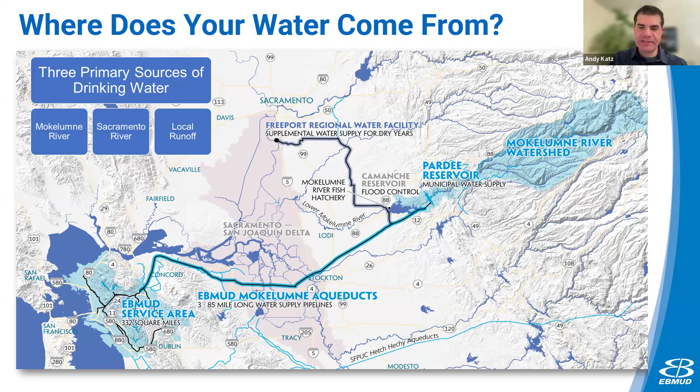And some other important facts to share that I think are important to note: about 90% of the water from the East Bay comes from the Sierra Nevada. So we're primarily collecting water in that upper Mokelumne River watershed. And 10% of our water is gathered in local reservoirs, primarily over the hills in the East Bay Hills area, and also in Lake Chabot. So that's about 10% of our water supply and storage.

The next slide, you can see some of the statistics that I just read off, but you can also see that we are serving all of you with 4,200 miles of pipeline. That's a lot of pipe. We operate in complex pressure zones where we have to make sure that everybody is getting good water pressure. We store reservoirs at different elevations to make sure that the engineering allows for a balance of water pressure and serving everyone with gravity-fed water supply. We do have to pump it up to get to those gravity-fed places. So it's a complex system, and there's a lot of careful engineering at work here.

I also call attention to the wastewater side. We have wastewater operations that you can see in the shaded box. So we don't serve the entire East Bay community with our wastewater services, but we make sure that we protect San Francisco Bay by having a main wastewater treatment plant. We work with our cities to collect the wastewater, and then it's conveyed into our collection system, and then we treat the wastewater at roughly around the MacArthur Maze.

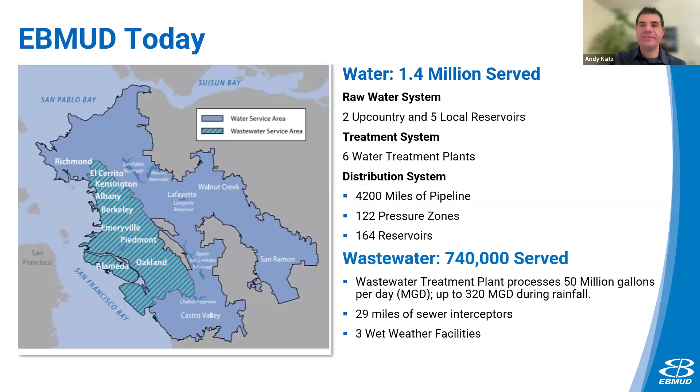So these are the big challenges that we're facing. First, aging infrastructure. We want to invest and renew infrastructure for reliability and resiliency. Our water supply, this is on the next slide. So we're planning for water supply into the future. Our environment. We're ensuring environmental stewardship for the watershed and San Francisco Bay. Climate change, adapting to climate change through infrastructure investments.

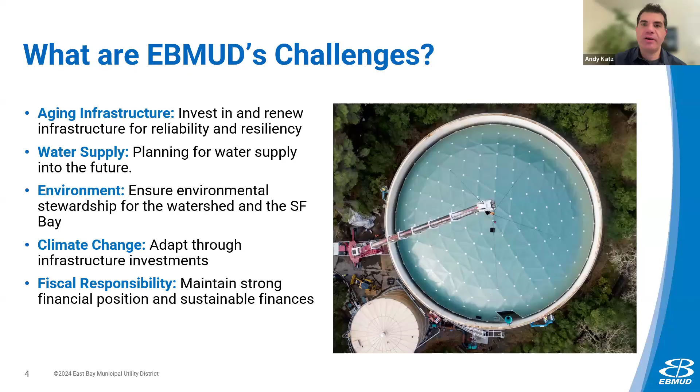We also have a fantastic zero net energy goal that we're moving towards by 2030, to have zero emissions out of our operations. And so we're not just adapting for climate change, we're also a part of the solution. And our fiscal responsibility, maintaining a strong financial position and sustainable finances.

So first, let's talk about investing in water supply. First and foremost, we want to be thinking about the future and making sure that our long-term water supply is reliable for us. And it's important to me to understand that we're getting that future water supply from a source that's sustainable, that continues our long history of being a steward for the environment, and that we don't impact or damage the environment to the extent we can.

So the Mokelumne supply is variable and vulnerable to droughts and climate change. We know that we're getting more frequent and more intense droughts because of climate change. And so that's why we have water conservation and water reuse programs that help us reduce demand. So in recent droughts, we've brought in supplemental supplies. That's what I referred to with our Freeport project.

That we have a Freeport intake facility on the Sacramento River, and we're exploring other diversified supplies. We have a partnership with some rice farms along the Feather River in far northern California. So we're also exploring very critical partnerships with farms in the northern San Joaquin Valley that I think are very important to preserve the groundwater basin and the areas in the North Valley, because the northern San Joaquin Valley, like much of the Central Valley, is losing its groundwater storage.

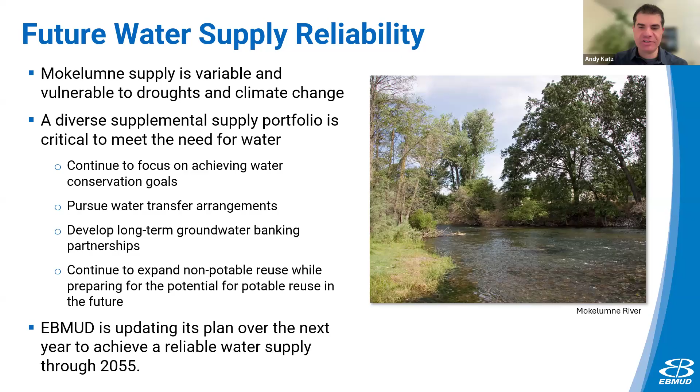And those partnerships and operationalizing many of the long understood principles about how to partner on preserving our groundwater aquifers, we're doing that. So we're moving forward on that, but we're not yet actually taking water and bringing it into our system on a large scale just yet. So we're updating our water supply plan over the next year to achieve a reliable supply through 2055. This diagram shows the different main buckets of water supply in our portfolio.

There are all of the different ways that make sense to different people, but collectively we are saving 45 million gallons per day of water conservation, and we want to increase that even more. Our goal is to increase water conservation to 70 million gallons per day by the year 2050. So in addition, we're looking into groundwater storage banking projects to bank water in those wet years and extract water during dry years. So these are all of the different components of our water supply program.

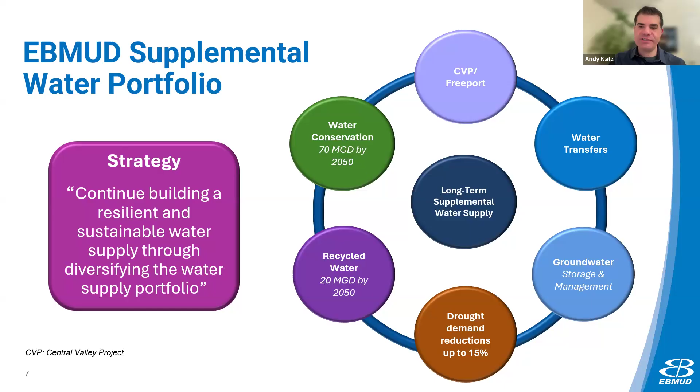And we, of course, do plan that in droughts, we'll need an extra push from our customers. So we consider drought demand reductions during those emergencies of up to 10 to 15% to be an important part of our portfolio too. And so this table on the next slide shows more information on the potential supplemental supply sources. While we have a successful non-potable reuse program that provides recycled water for irrigation and industrial uses, we also will explore the potential for using highly purified recycled water as a drinking supply in the future.

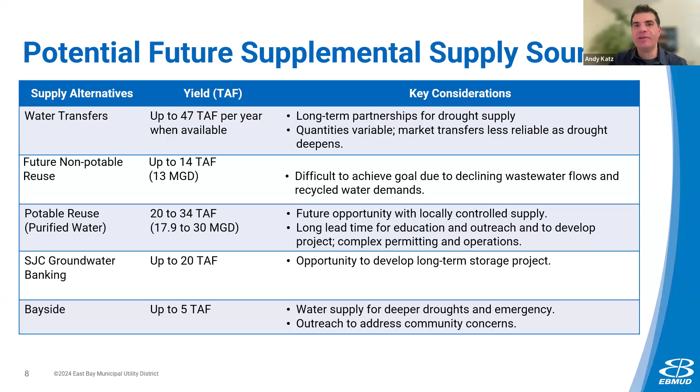I am interested in feedback about this. I'm very concerned about ensuring that we do not expose people to PFAS, that we keep our water quality high. But we need to make sure that we are maximizing conservation. But we have to look at all of the water supply options, particularly when new technology allows us to convey water that's reliable and safe. So this is something that many California agencies are considering or have implemented, and we're paying close attention to what other communities are doing.

You may remember that in the last major 4-year drought, many years ago, in that last year, we had that situation where the water had that algae kind of taste for just a couple months. We're glad that it was temporary and it never caused any safety issues. It was always safe to drink. But we took those taste and odor issues very seriously. It was the first time it had ever happened, and it's just because the water level in Pardee Reservoir sank so low that the intake valve was just at the level where a small plume of algae had bloomed.

And so we took that seriously and said, well, we need to really be able to make sure that our water treatment plants are up to the task of being able to clear those sorts of taste and odor issues in the future. So our water treatment plant is now able to actually neutralize those types of issues going forward. I'm very excited that we've made that investment; little things like that make a big difference for making sure that people can always rely on and trust our water.

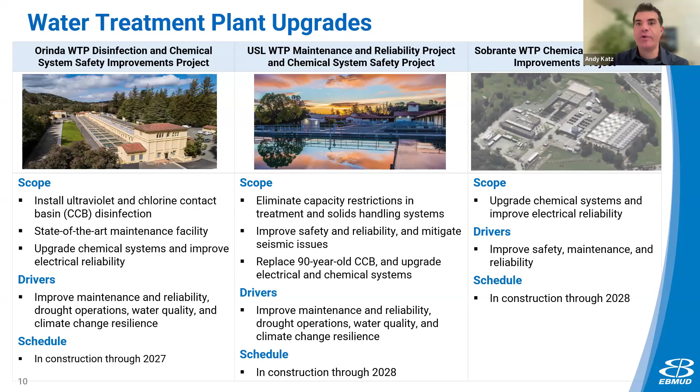We have upgraded our Caldecott aqueduct to be able to withstand a Hayward 7.0 earthquake. But we want to make sure that we are resilient and able to provide reliable water to customers, even though we will have disruptions in a Hayward 7.0. This is just for major infrastructure that would take years to rebuild. We need to make sure that is sturdy and ready to withstand the best that we can plan for.

So what's happening locally, though? As I mentioned, we have 4,200 miles of pipe, and we have other major facilities like smaller aqueducts that are conveying water through different portions of the service area. So our engineering team has provided a slide that lets you see where construction is happening in our community. So I'll point out some of the major projects that are happening.

One at Clayton, Fairmount, and Webster. That's a rate control station. Design work is happening much later. We're really just starting to plan what the needs are at that site. You can see it in El Cerrito. There's a Glendale regulator that you can see just at the top of Kensington. That is a standby regulator. So we are planning on constructing a new water pressure regulator. Planning for that will start next year, and design work and construction through 2027.

You can also see the Summit West pumping plant and the Berryman pumping plant are on our list here. Those are both in Berkeley. And the plan is to replace the existing Summit West pumping plant and demolish the Berryman pumping plant. Design is going to start this year and construction by 2030. So we're always planning for our infrastructure improvements, because it takes a long time. We are seeing our infrastructure aging and making sure that we get ahead of the problem.

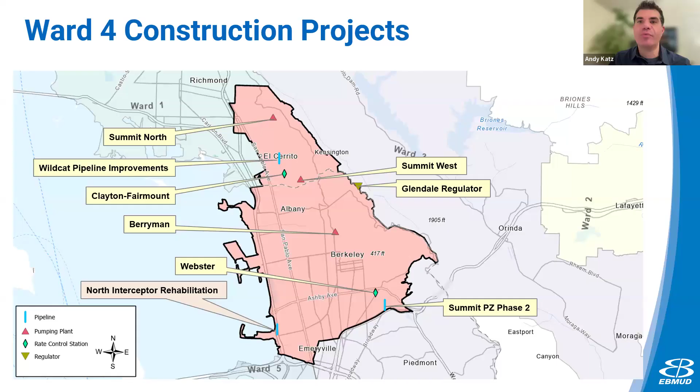So those are some of the major projects that are going on right here in Ward 4. I represent those areas that are in the previous slide. That includes Berkeley, Albany, Emeryville, El Cerrito, Kensington, and the northern portion of Oakland. Proud to represent our area and make sure that we are rehabilitating our local infrastructure.

And here's a list of some of the planned pipeline construction. This list just includes Berkeley. We do have a lot of pipes under construction in this fiscal year in Emeryville and Albany and our whole service area. But just so you can see what's happening here in Berkeley, these are the clusters of streets that are getting replaced. We are going to replace 11 miles of pipeline in Berkeley over the next year. And this table gives you an idea of where we'll be working in Berkeley.

So if you'd like to know more about the projects, you can visit ebmud.com and go to construction in my neighborhood. And if you'd like to receive an alert when there's an outage in your area, you can sign up for notifications at ebmud.com/alerts.

So one of my goals, however, with our planned pipeline construction is to open a dialogue with all of our cities. And I'm focused on Berkeley to start with, because Berkeley just passed a major ballot measure that increases funding for street rehabilitation.

I was proud to support the ballot measure, and we now should be able to see Berkeley taking advantage of that funding, expanding the 5-year paving plan. But what I would like to see is an increase of a partnership approach that we have taken here and there. But when we dig the streets, we are spending public money.

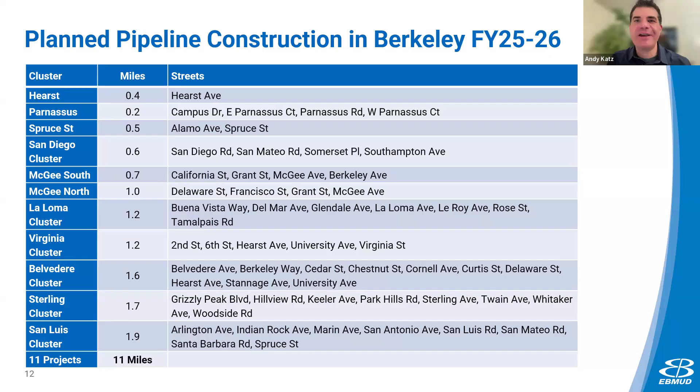So I know that it's not so easy to go to the cities and be like, why don't you go expand your 5-year plan for our 11 miles of pipe? There's a lot of considerations that the cities have, but we can do better. We can do more. So that's a major goal that I have going forward. And let's keep moving and talk about investing in climate resilience.

So EBMUD has updated its climate action plan to respond to the increasing challenges of climate change. EBMUD has been committing to be carbon neutral by the year 2030, and we are the first water agency to have created a goal like that. It is one of the most ambitious goals of any water agency, any utility in the country that's engaged in water and wastewater, and we want to make sure that we are a part of the solution for preparing for climate change.

Climate change is affecting every part of our operations, from water availability to wildfire threats, customer needs, and infrastructure risks. We're already seeing the effects: more severe and more frequent droughts, stronger storms, wildfire impacts on water quality, and sea level rise that threatens wastewater facilities. So our goal is to prepare for those challenges and also achieve carbon neutrality for water and wastewater by 2030. We're doing that by minimizing our energy use, upgrading our facilities to use less power, be more efficient, and manage demand.

We are purchasing low or emissions-free energy. So I'd like us to be buying from AVA and MCE as much as possible and to opt up to the greenest portfolio available. We also are transitioning those tariffs in the areas outside of the AVA and MCE service area where we have to pump water out of Freeport, for example. So we are making sure that we're procuring low emissions energy.

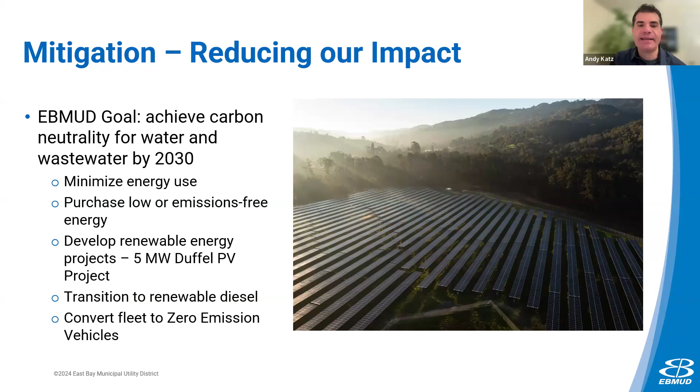We're preparing for our climate impacts, not just by cutting emissions, but also adapting to the changes that are already happening. I already talked about diversifying water supply sources in our conservation programs, helping residents and businesses use water more efficiently. We're also upgrading our treatment plants to be able to handle algae blooms, water turbidity, and other new challenges. We're thinking about sea level rise.

It's a big conversation to be thinking about how will sea level rise affect the main wastewater treatment plant. And that's a conversation we have to have with many jurisdictions and figure out what is the best solution for the whole region. And we're also protecting our San Francisco Bay from nutrient discharge.

You may remember the year that we had a very significant fish die-off because of a very big heat wave that caused the nutrient load that primarily comes from human waste from our wastewater treatment plant. We needed to make sure that we could reduce our nutrient load that was discharged into the bay. And I'm very proud to say that we were able to reduce our nutrient discharges by about half by using some creative scientific processes that we just hadn't challenged ourselves to do yet.

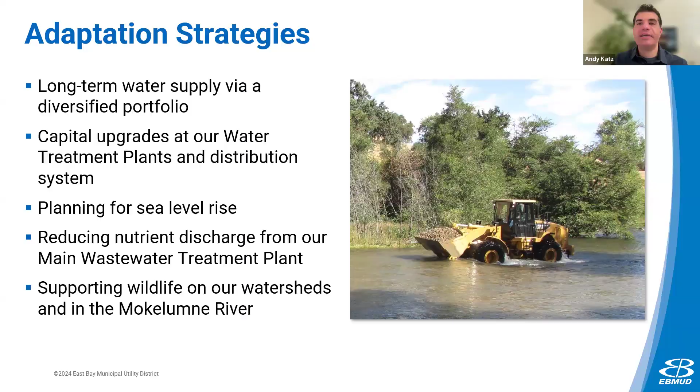How are we investing in preparedness for the future? So we operate 24/7 control centers that increase system pressure for firefighting. We're making sure to manage reservoir water levels. So when we have a high risk or a red flag day, we top up the water reservoir, even though we normally wouldn't necessarily keep the reservoir completely full for water quality purposes.

When we know that our local firefighters could require those reservoirs during red flag days, we make sure that they're completely full. We make sure that when we're going to have disruptions to electricity on those public safety power shutoff days, we deploy portable generators to make sure that the water is always pumping. And we also maintain local water storage to support aerial firefighting.

It's important to know, as we're reflecting on the lessons learned from the 1991 East Bay Hills fire, that our local water supply system, just like we saw in the Palisades fire and in other fires that have been catastrophic around California and the country, that a municipal water supply system is not designed to be able to put out a wind-driven wildfire.

We can make sure that the water is flowing into the hydrants to be able to take out a neighborhood scale fire. It requires strong standards of coverage to make sure that firefighters can get to a site within good standards of coverage to prevent that fire from overtaking the house and spreading. And so we're an important part of the solution to make sure that water is working in the hydrants.

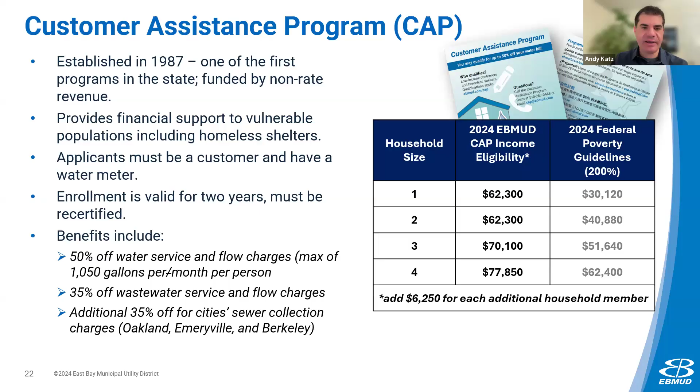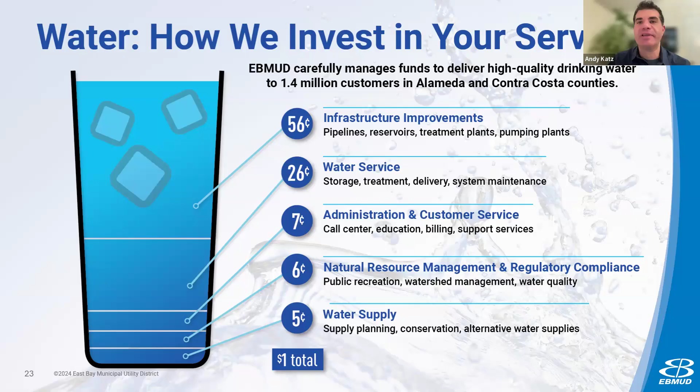Another portion goes into natural resource management, making sure that we have a high quality watershed that's resilient for fire protection and forest health, and that protects our water supply. And then additional planning for water supply conservation programs and other water supply purchases that we have to make. So that's how your cents on a dollar are spent. Overall, we have $1 billion annual budget, and we strive to make sure that we're spending your ratepayer money responsibly.

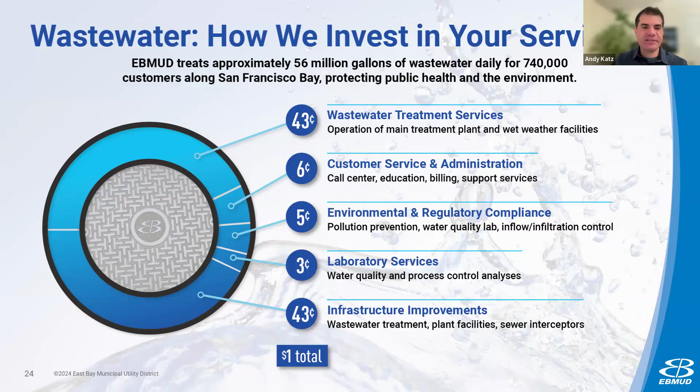We did just complete a cost of service study that looked at how we are making sure that all of our charges are proportionate to the actual cost of providing the service, so that when we're designing our rates, they are fair and actually represent the cost of providing that service. And we were able, through that process, to actually reduce the fixed charge on the bill. So the fixed monthly service charge actually was reduced by about 25% compared to the percentage of the total budget. I think that's important because it helps make sure that there's a fairness in how everybody is charged, but it also is helpful because we know that you can't avoid that part of your bill.

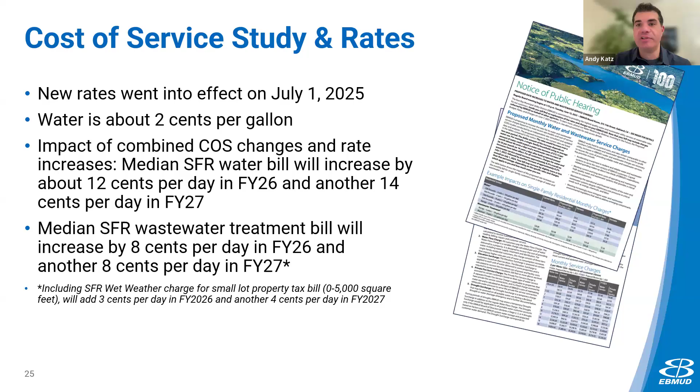You can avoid the volumetric parts of the bill by conserving more, and I'm very glad to see that we're rewarding communities that have high conservation customers who are working hard to be as efficient as possible; they are seeing a little bit of a lower bill because we've reassessed our cost of service study.

And next, we're investing in the future. And what does that mean? Everything that I've talked about is investing in the future, but here I'm talking about our education program. And our focus on education is about driving engagement from all segments of the public and stewardship. It's really important to me to make sure that all ages are getting strong backgrounds in what we do to support the public, to support public health, environmental stewardship.

We want to make sure that, as a public institution that isn't always the first place that constituents call — many people call their council member first or their legislator first, don't really know how to reach us — that we're getting the word out about how we manage these concerns in the East Bay.

But it's also about preparing a future workforce, really inspiring younger generations to think about going into environmental careers or just being environmental citizens. So one of these programs is our K through 12 offerings, and I'm especially enthusiastic about expanding 5th grade field trips. So while we offer school assemblies and lots of classroom resources, what I found really concerning a few years ago is looking at the disparity in Title I schools and certain school districts just not taking advantage of our field trips, where rangers help the kids learn about the watershed.